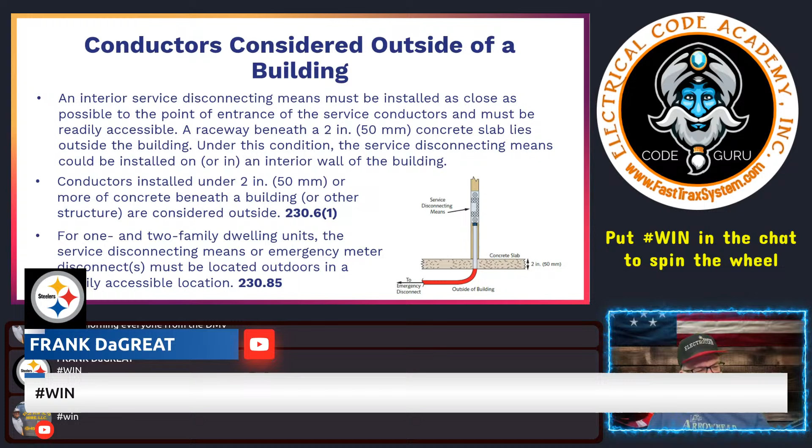Let's get back into our discussion on conductors, service conductors, and equipment. Let's talk about applications where conductors are considered outside of the building. So the National Electrical Code tells us when things are considered outside of the building. We have 230.6. Most of the time in these types of questions, when we're really concerned with something being outside of the building, it's more a service conductor driven thing, right?

Because a feeder can run through a building, and a feeder is protected by an overcurrent protective device, right? So there's protection there, but service conductors are not. The only thing those service conductors are protected from is overload, because we size the overcurrent device and we're required to provide overload, but we're not providing any short circuit or ground fault protection to those supply side conductors, right? So it's just overload protection. But if they run through a building, they really have no protection on those conductors that we can control, right? It's utility side, and I don't have control over them.

So an interior service disconnecting means must be installed as close as possible to the point of entrance of the service conductors and must be readily accessible. You're familiar with 230.70, 230.71, 230.72, the grouping requirements. But 230.70 tells us that the service conductors have to be outside or nearest point of entry, right? So in this case, what is considered outside? Well, one of the things says a raceway like this right here, installed beneath 2 inches of concrete slab, lies outside of a building.

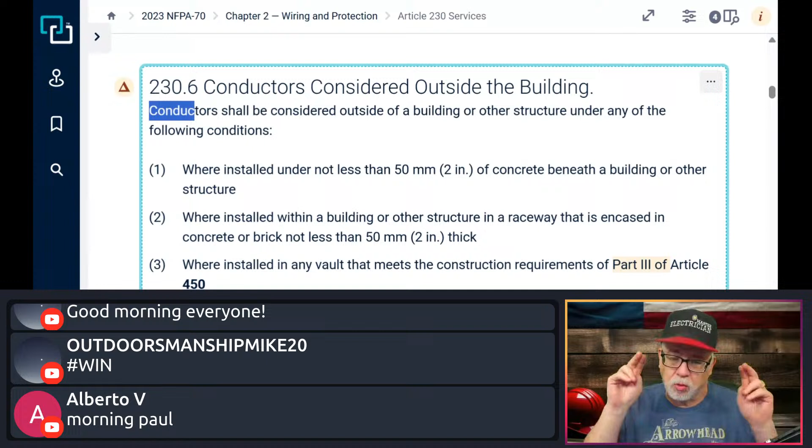So conductors, in a lot of other places in the code, when they want something to be considered outside of the building, they'll refer you here. Why reinvent the wheel, okay? They might send you to meet the rules of 230.6, even though it might be some other application. They're telling you, hey, you want to be considered outside the building? Go follow the rules here or one of the methods that are in 230.6, right?

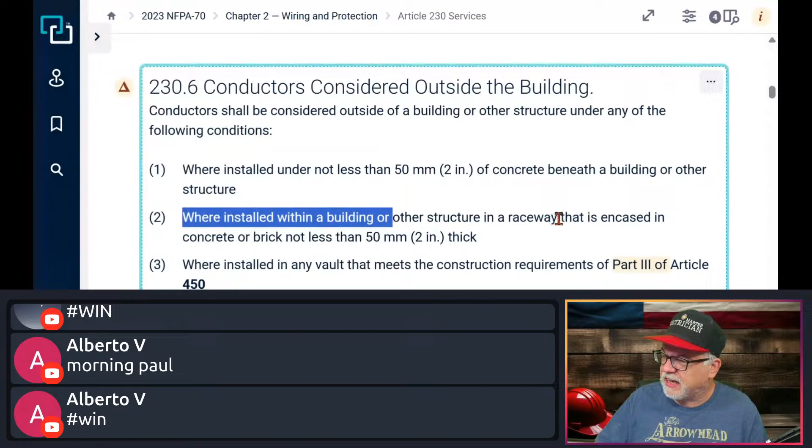Okay. Here, where installed within a building or structure in a raceway that is encased in concrete or brick, not less than 2 inches thick. So this happens all the time where maybe I want to put a service further into a commercial building, for example, and I'll run it underneath the building, and then they'll run it up into the building, but they'll encase it in 2 inches of concrete or 2 inches of brick.

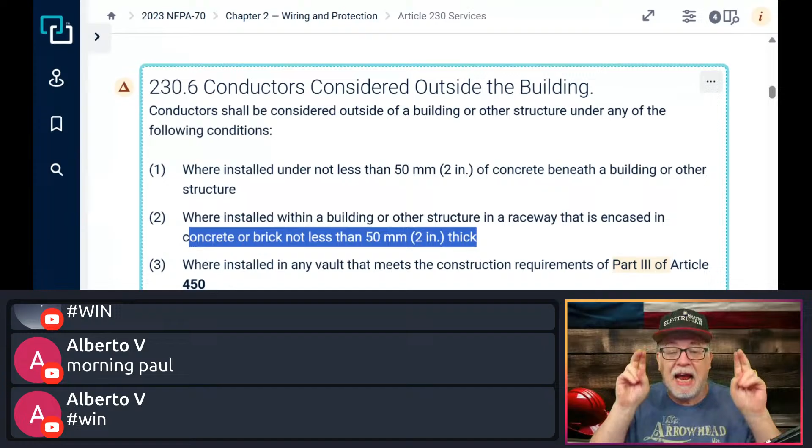Okay, and then run it up, and then they'll put their equipment. And you might go, well, it's in the building. Yeah, but it's considered outside of the building by proxy of following these rules in 230.6, right? All right, so then you got that.

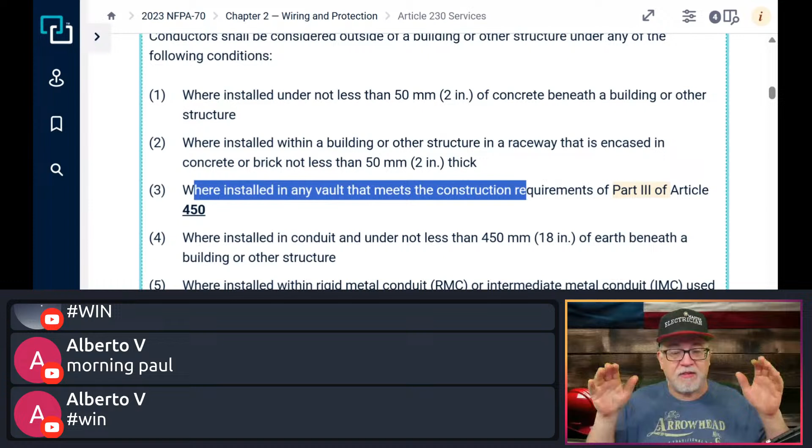And next it says where installed in any vault that meets the construction requirements of Part 3 of 450, right? So this would be like a transformer vault that has the requirements, the thicknesses, and everything like that. Well, it's a vault, and it's basically considered outside of the building if you have the vaults. So there's some advantages to that because you can come underneath the building, right? And then pop up into a vault and everything is still okay, all right?

Let's see here. Next, it says where installed in conduit and under not less than 18 inches of earth beneath a building or other structure.

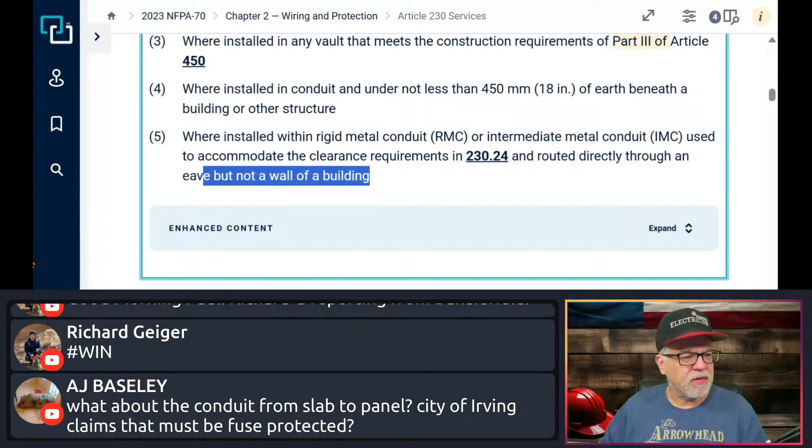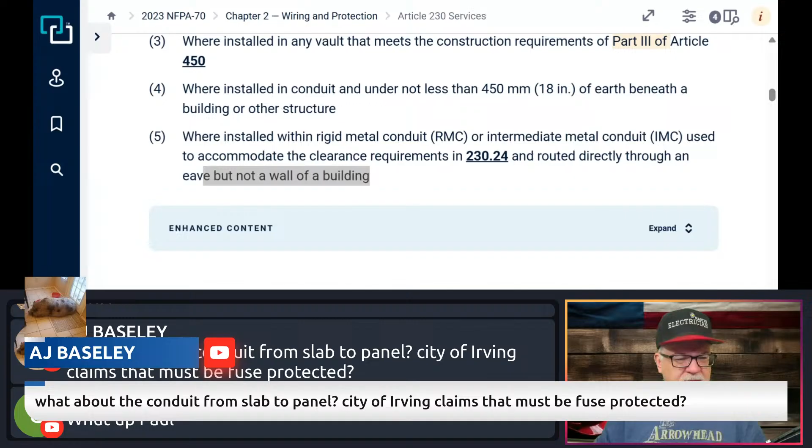AJ says, what about the conduit from slab to panel? City of Irving claims this must be fuse protected. If it is in the slab and it's a service, okay, if it is encased in 2 inches of concrete, well, the code says that either below 2 inches or it's encased in 2 inches, okay? So again, we go back to reading what it says here.

It says, where installed within a building or structure in a raceway that is encased in concrete or brick not less than 2 inches thick. Okay, so it has to be encased in it. So whatever raceway you put in it, it has to have 2 inches of thickness around it. It's not like you can put it in it and only have a ½ inch of concrete. It has to be encased in it. So a 4-inch slab, you put a 2-inch raceway in it.

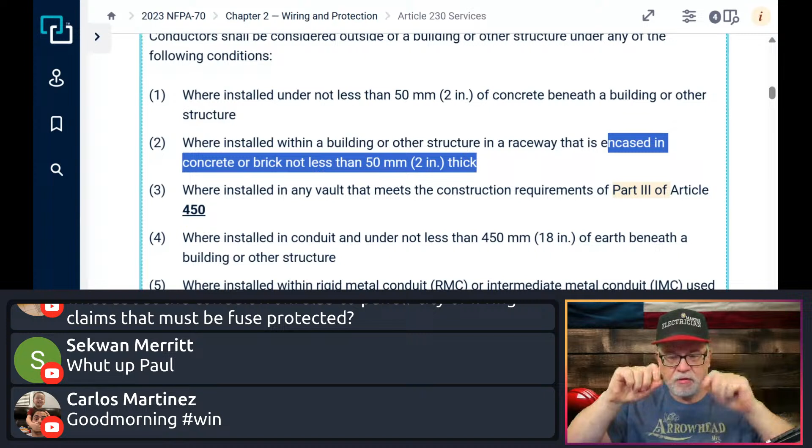Then what happens is you've got the actual diameter of the raceway, and then you have the concrete. Is it going to be 2 inches encasement around it? Right? Which means if you have a 2-inch diameter raceway, then you'd have 2 inches on the top, 2 inches at the bottom. So that slab would have to be what? 2, 3, 4, 6 inches thick. So they could be doing that where it doesn't qualify.

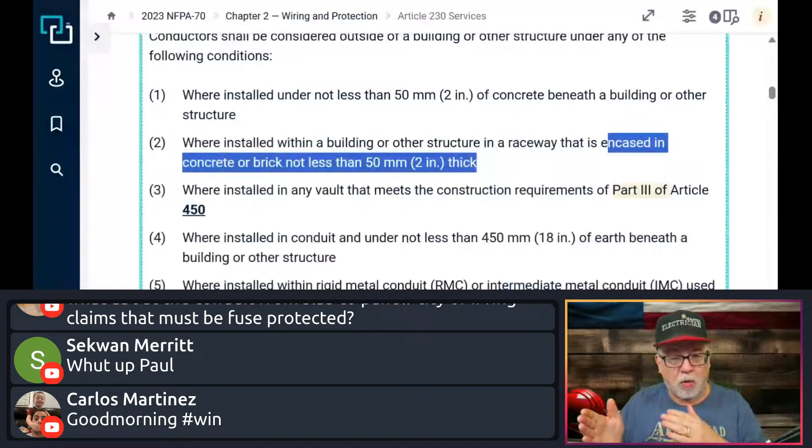Also, the big difference is whether or not we're talking feeders or service. So if we're doing this to try to keep it outside of the building, you'd have to get a little more clarity from them on why they're saying it needs to be fuse protected. Is it outside of the building? Do they have an amendment that says they're ignoring the allowances in 230.6(2)? Are they not observing this? Because here it says it's considered outside the building for any of the following conditions, okay? So you'd have to find out what their rationale is behind it.

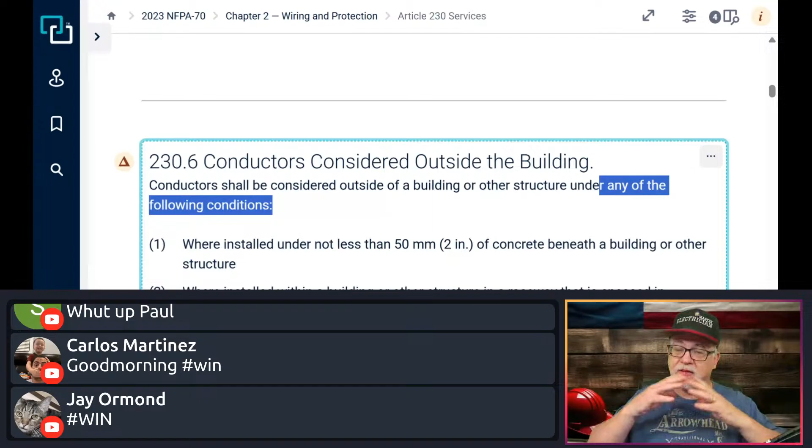Now, all feeders have to have overcurrent protection. Service conductors, again, if we're doing it to consider it outside of the building. Now, that's not going to work for 1 and 2 family dwelling applications because you're required to have an emergency disconnect outside, okay? But in other than 1 and 2 family, you can run it in the walls, that type of thing. All right, let's get back to the lesson.

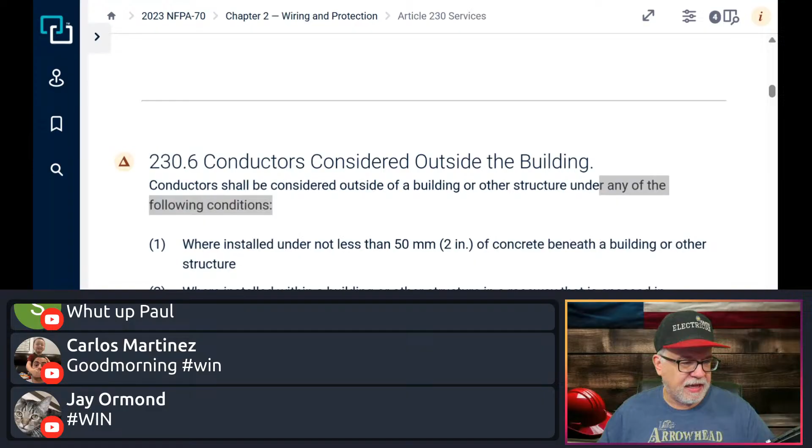All right, so that was that one. Below 2 inches of concrete: conductors installed under 2 inches or more of concrete beneath the building. Okay, there you go. All right.

All right, for 1 and 2 family dwellings, the service disconnect means or emergency meter disconnects must be located outdoors in a readily accessible location. So if you're doing 1 and 2 family applications, that right here, good.

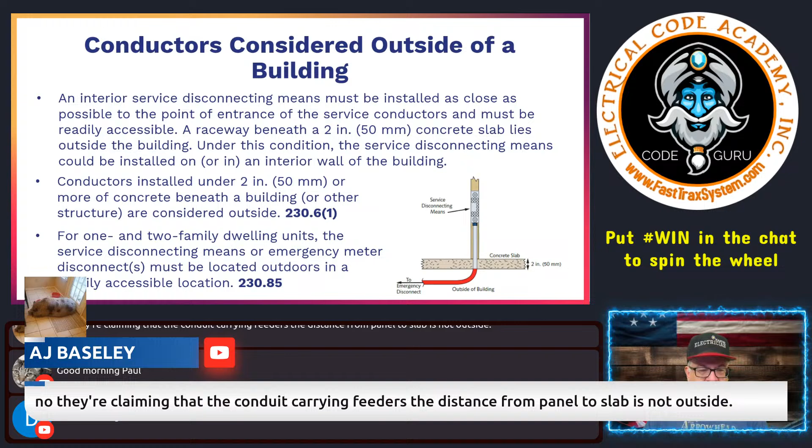What are they saying, AJ? They're claiming that the conduit carrying feeders, the distance from panel to slab, are not outside. If it's a feeder, it doesn't matter. All feeders have to have overcurrent protection. That's the only way it becomes a feeder. So I think either we're having a terminology issue here or not understanding. Are you talking about service conductors or are you talking about feeders? Because for a technical guy like me, they are different.

So yes, all feeders, whether you run it outside of a building or in the building, have to have overcurrent protection on them. Service conductors, if you follow these rules in 230.6 and you're either putting it in a conduit 18 inches below grade, or you're putting it in a conduit that's encased in concrete, 2 inches of concrete all around it, then it's outside of the building.

If you're doing it below at least a 2-inch slab, then it's considered outside of the building until the moment that it penetrates and goes into the building. Unless when you penetrate, it actually is penetrating in a brick or concrete column that is going to give you 2 full inches of concrete around it.

So again, they may not be understanding it, or maybe the situation has a few more details involved. Every installation is different, but it sounds like there's some kind of miscommunication going on with that application, or it could be just what they want.

And I will tell you, Irving, Texas tends to have a couple inspectors that can go rogue now and then. There's a great inspector in there, James Hawthorne. He's a great guy. But sometimes some of those inspectors can go a little bit too far because they're very heavily involved in the code development process and they form their own opinions. Not saying James, but in general. Sometimes they can go a little too far, but again, there's probably more details than that.

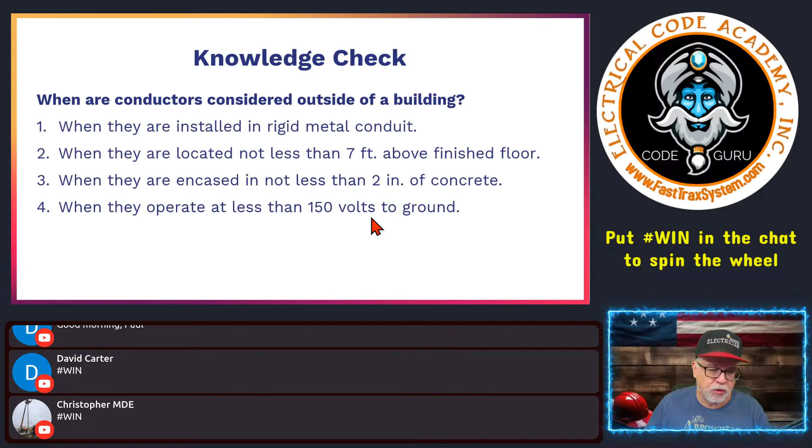All right, knowledge check. When are conductors considered outside of the building? When they are installed in rigid metal conduit? When they are located not less than 7 feet above finished floor? When they are encased in not less than 2 inches of concrete? And encased means the raceway has at least 2 inches of concrete all around it. And 4, when they operate at less than 150 volts to ground. Well, there's only one obvious answer here, and that is when they're encased in not less than 2 inches of concrete.

Let's see here. Tom says, wouldn't the closest point of entry apply once the service entrance raceway exits a slab or concrete encasement? Absolutely. So in our example, let's go back right here. This is a panel. If this is concrete encased, 2 inches of concrete around it, and this is underneath the slab, and I bring this up, this is considered outside.

If we installed it in a raceway that was encased with 2 inches of concrete all around the raceway, then guess what? It's still considered outside of the building, even though it's entering into the building. It could go to the second floor, but it's still considered per code outside of the building if you follow those rules in 230.6. And we do this for fire pump applications and other things where we want to keep those conductors outside of the building, but we may want to put it further in.

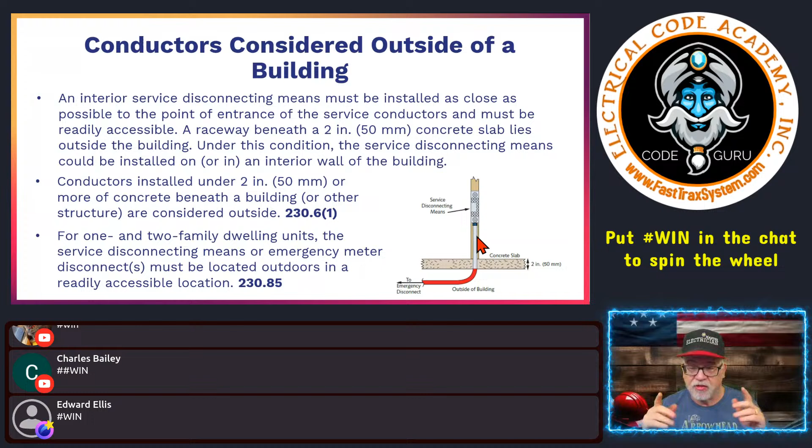The moment that it goes from outside of the building to inside of the building, then we need to have the overcurrent protection established. Now, we're not talking 1 and 2 family right now. We're talking general commercial and other than 1 and 2 family, because that still requires the emergency disconnect application under 230.85 for a 1 and 2 family.

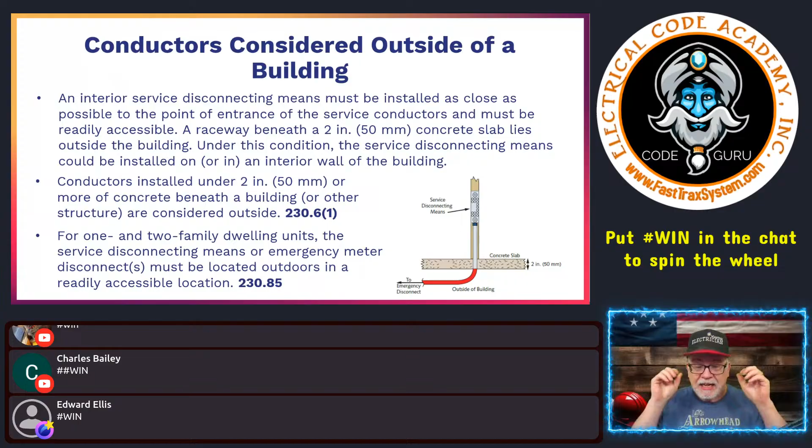Now, people say, well, wait a minute. If it comes through the slab, it's in the building. No, it's not. If it's in a raceway that's encased in 2 inches of concrete, by code it still has not entered that building yet. Basically, that concrete is separating the building from what's considered outside. The moment that condition changes, then you get the requirements for the service disconnect being outside or nearest point of entry.

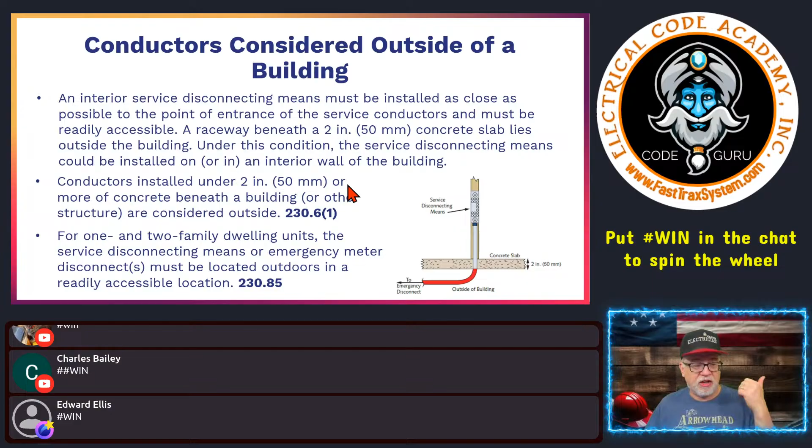Now, could you put it outside somewhere? Absolutely. Carry it in? Yeah, you could do that as well. You could even change it to a feeder. And once a feeder comes in, then you could run it through the building. Okay, not a problem.

All right, underground services. Wiring methods permitted for services of 1,000 volts nominal or less are listed in 230.43. We're going to kind of look at those. We're not going to spend a lot of time on them because that's a simple list of all the different wiring methods that are applicable for services, okay? And that is going to be in 230.43. That's like a list of all the different types of wiring methods.

Now, direct buried conduits or other raceways must be installed in adherence with Table 300.5(A) minimum cover requirements, okay? 300.5, just so we can look at it. This is a depth of cover table, and people ask me quite a few questions about this. So this is for underground applications. This is minimum cover. This is for direct burial cable. This is for conduit or other raceways, which shall be installed to meet the minimum cover requirements. So this is your minimum cover requirements table right here.

Right, 0 to 1,000 volts. Here's your depth of cover. And over on the left, you have the location of the wiring method or the circuit itself. So it's the general catch-all, all locations that are not specified. People ask me all the time, what do I do if it's not specified down here? Well, then you go right here. There's your default. Pretty simple. If you have an application where you're going to use these down here on the left side, then you have varying depth depending on the wiring method or type of exposure, right?

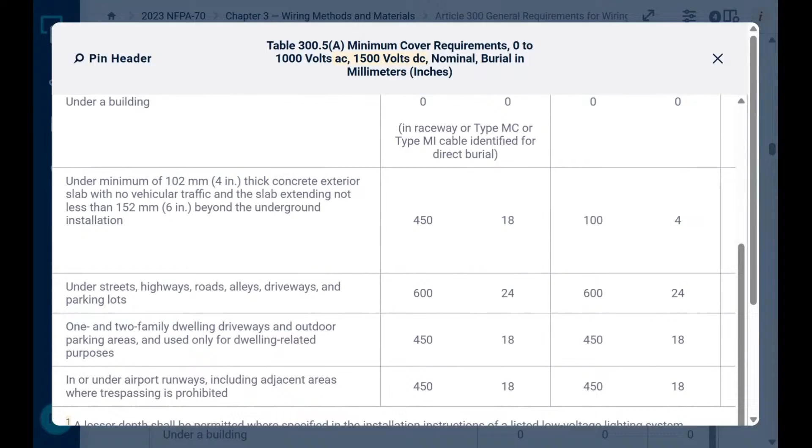So an example, direct burial cables, USE-2, just a cable assembly rated for direct burial, or the individual insulated conductors like a USE-2 that are either plexed together or dropped in a trench. Their cover is going to be 24 inches. The utility may be deeper. Theirs might be 30 inches, might be 36 inches. But we're not talking about the National Electrical Safety Code. We're talking about the National Electrical Code. So this is your catch-all for all of the locations, just for direct burial cables.

But what if I have all those other locations and I'm using rigid metal conduit or intermediate metal conduit? Then I can reduce the depth of cover to 6 inches because of the strength of the rigid metal conduit or intermediate metal conduit. So what does that mean? One of the most important things I talk about is that it's about the cover. It's from the top of the wiring method to the final grade. Whether you have asphalt, dirt or gravel, it's the final grade down to the top of the wiring method, not to the bottom of the trench.

So a lot of people may make a mistake and dig an 18-inch trench when the cover requirement may be 18 inches, but they forget that the raceway they're putting in there may be 2 inches in diameter. So if they have to have 18 inches of cover, right?

So at the end of the day, you get to have a reduced clearance, but you have to make sure you're accounting for the top of the wiring method all the way up, not just the trench itself. So an 18-inch cover might need to actually be a 20-inch deep trench in order to accommodate the wiring method. You get what I'm saying? So here you see the columns. This is for direct burial, and this is just the catch-all locations right here, the very top one.

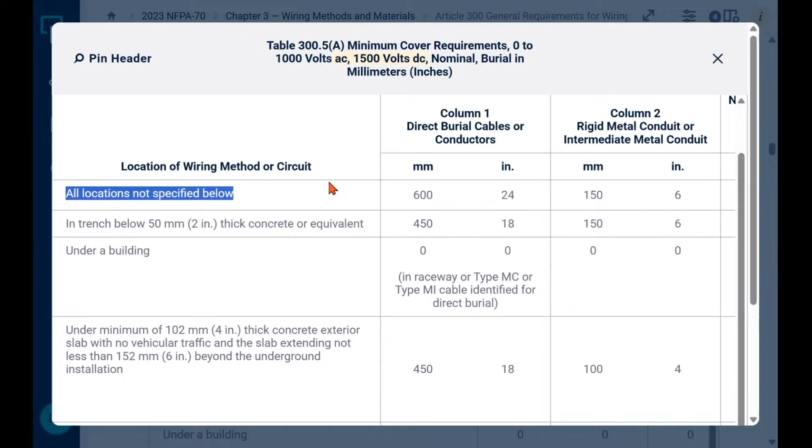And I usually tell students a lot of times to highlight this with a different color just to make sure that it stands out, because you get some reductions down here based on these actual locations of where the wiring method or the circuit is. But this is your catch-all right here, all right? And you go over here to the right, you'll see here, this is your column 3.

This is for EMT. Again, I have so many people that say, oh, you can't throw EMT in the ground. You most certainly can. In fact, it's listed right here in the table. Well, I wouldn't do that. It would rust out. Then you've got some shitty EMT, because the manufacturers of it do put a corrosion-resistive coating on it. So, but anyway, here's EMT.

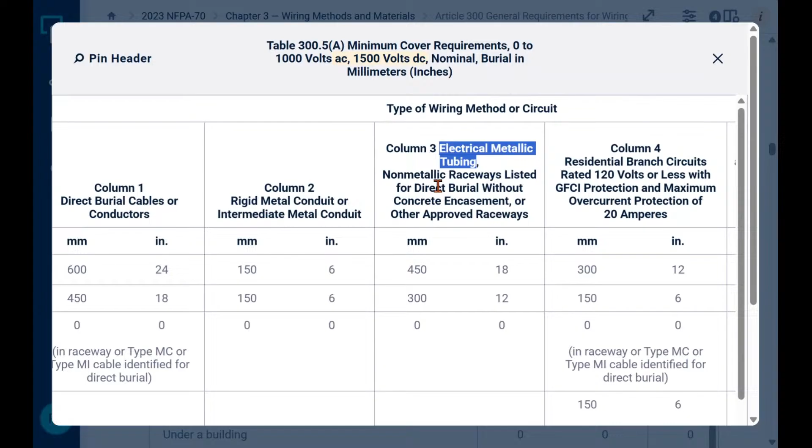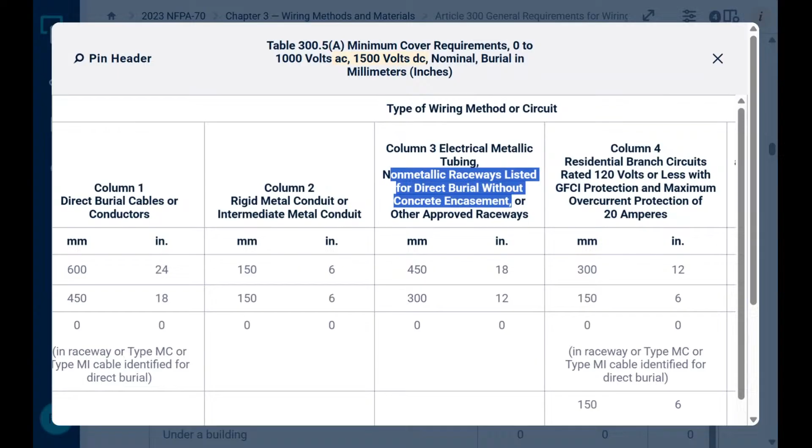Here's the non-metallic raceways used for direct burial without concrete encasement. That means that it's PVC, Schedule 80, Schedule 40, just thrown in a trench, right? There you go. Or other approved raceways from the manufacturer. This may be also like a reinforced resin type of raceway that the AHJ is okay with, that's marked for direct burial, that you could throw in there.

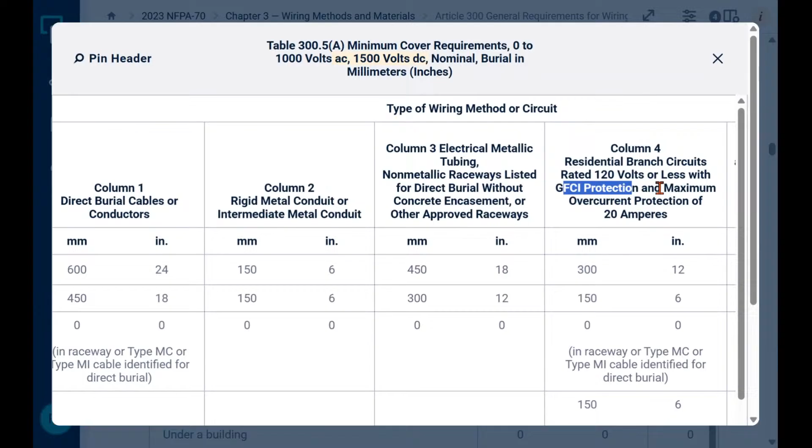There you go. And of course, you have column 4, which is residential branch circuits. An interesting one about this one is you have to meet all these caveats to even get any of these reductions, okay? So for residential, it has to be a residential branch circuit. It has to be rated 120 or less. It has to be GFCI protection on it, and the overcurrent protection cannot exceed 20 amps. If you meet all those conditions, let's say it's going out to a post light or something like that, then you can have a reduced cover.

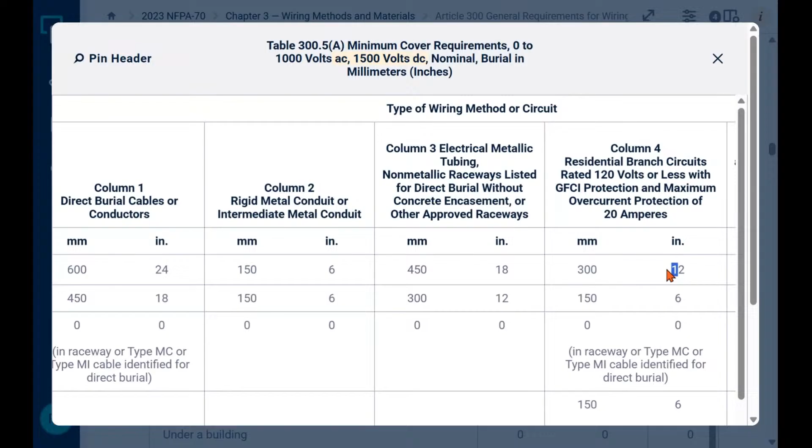So the general would be 24 inches, right? For a general application, for, let's see here, for a UF cable, right? But over here, if that UF cable is being used and it meets all this criteria, then they have a reduction to 12 inches of cover, okay? Makes sense? All right, so then you got that.

And then, of course, you got column 5, which is dealing with things like irrigation and landscape lighting and that type of thing. Not more than 30 volts, okay? Not more than 30 volts, and installed with type UF or in other identified cable assemblies. So you got to meet all of these caveats in order to get these reductions.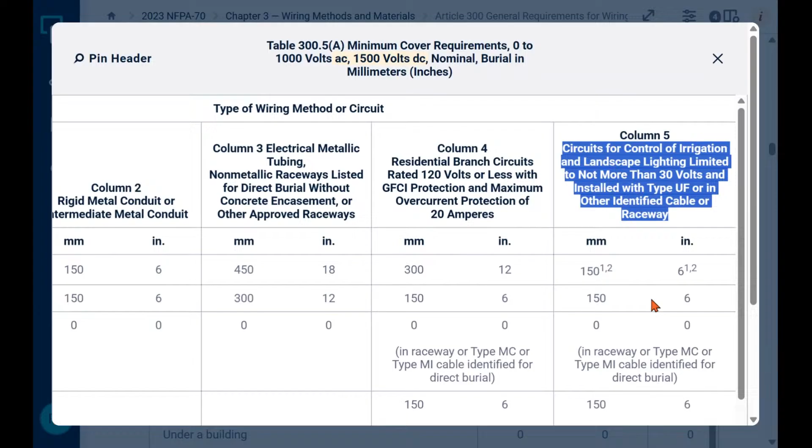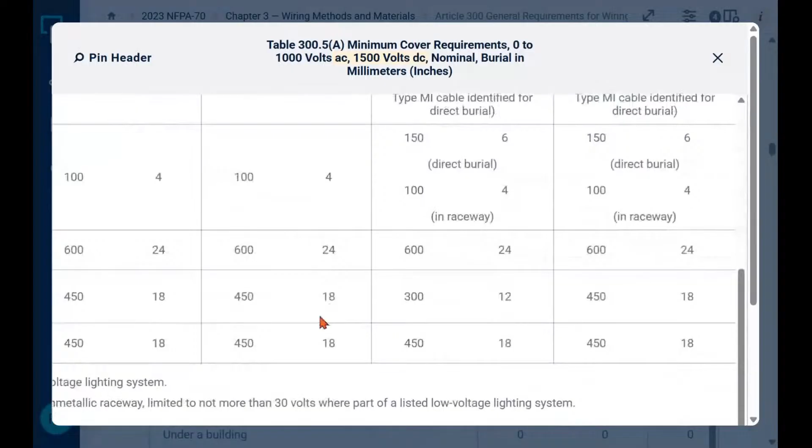Now, you do have some notes here. This is a good time for me to point out about notes again. All these notes that you may see in anything like this, these things like this, that's going to be talking about these different notes down here. And these different notes down here are going to talk about all kinds of things, whether or not you can reduce your depth of cover, what happens if you hit rock bottom when you're doing your trench.

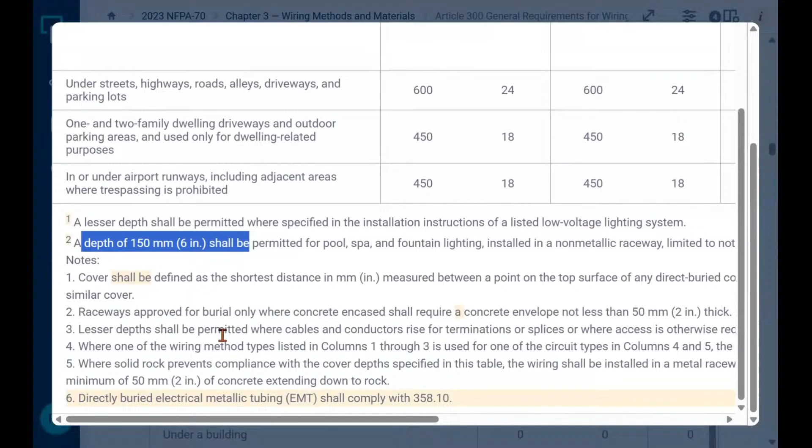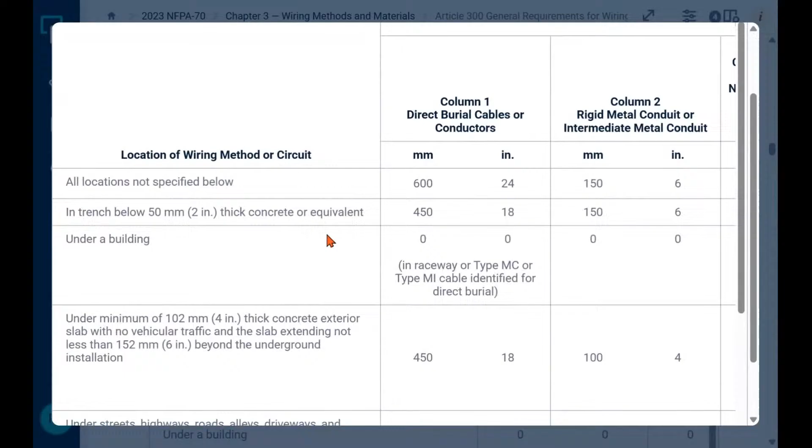These notes are very much applicable, guys. These are not like informational notes where you don't follow these. These are very much germane to this table when they're referenced, okay? So keep them in mind. These notes can be important, okay? So you always want to glance down at your notes because these may have some application.

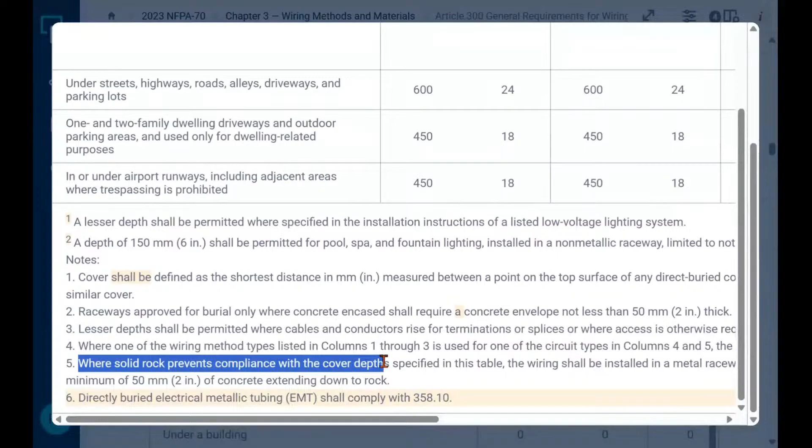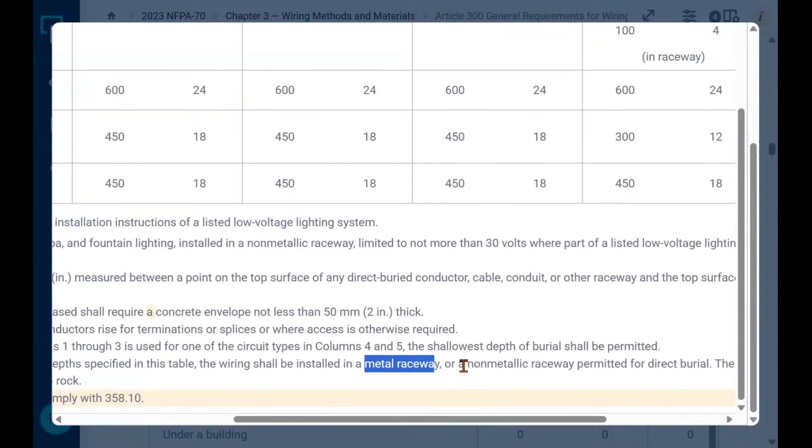For example, biggest one that we run into right here. So you're doing your depth of cover, right? You're digging your trench. And it says where solid rock prevents compliance with the cover depth specified in this table. It means you hit rock when you're trying to get down 24 inches, let's say. It says the wiring shall be installed in a metal raceway or a non-metallic raceway permitted for direct burial. It means it's marked for direct burial.

It says the raceway shall be covered by a minimum of 2 inches of concrete extending down to the rock. Okay, so minimum of 2 inches of concrete over top of it, above the wiring method, right? And if that's the case, then you can have your reduced clearance down to as deep as you can get because of the rock.

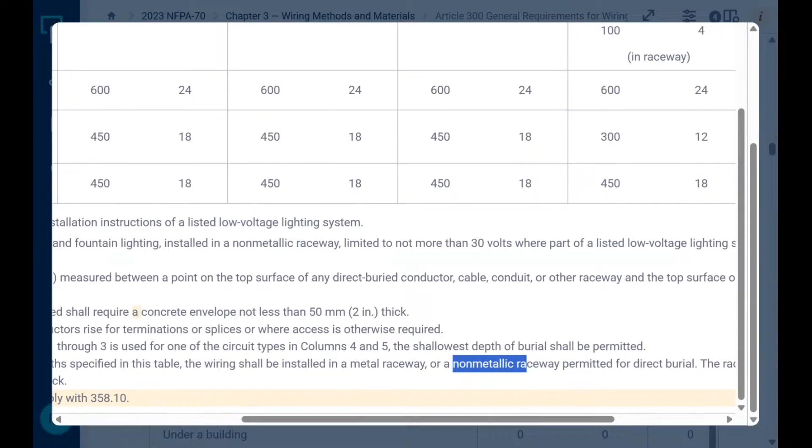But as long as you put this 2 inches of concrete over it, and you're putting it in a metal raceway or a PVC, for example, and it says non-metallic because it could be something like a fiberglass reinforced type of raceway, that type of thing. As long as you do that, and you're putting that 2 inches of concrete extending down to the rock, then, dude, you're okay. You're going to be fine. You're not going to have anybody damage it or whatnot like that.

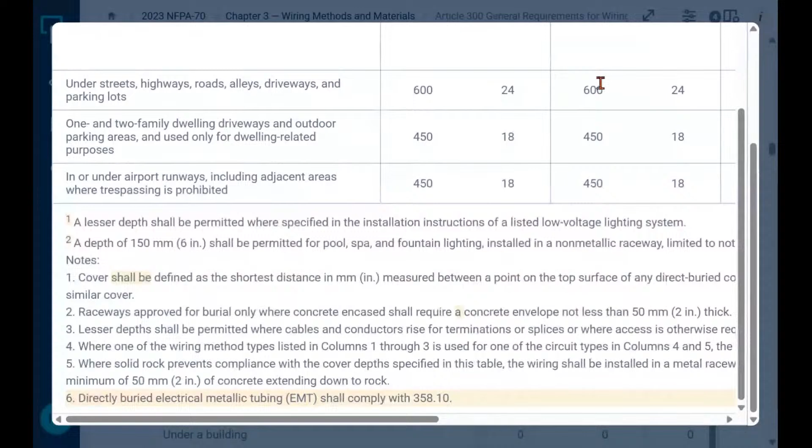So anyway, that's just kind of looking at the table. Let me get rid of that real quick. Let's get back to the lesson. All right, so there you go.

So it says where the conductors or cables emerge. Okay, so once you are under grade, and by the way, here's a good example of this. So this is your cover. Right? You got to account for the wiring method, okay? Got to account for the wiring method, okay?

Now, Peter says the compression, well, it's not so much about the compression as the fact that you couldn't use something like a standard EMT fitting because it's not going to seal. It's going to allow moisture to get into it. So you're not sealing it, and they're not listed and evaluated for direct burial, that type of thing, okay?

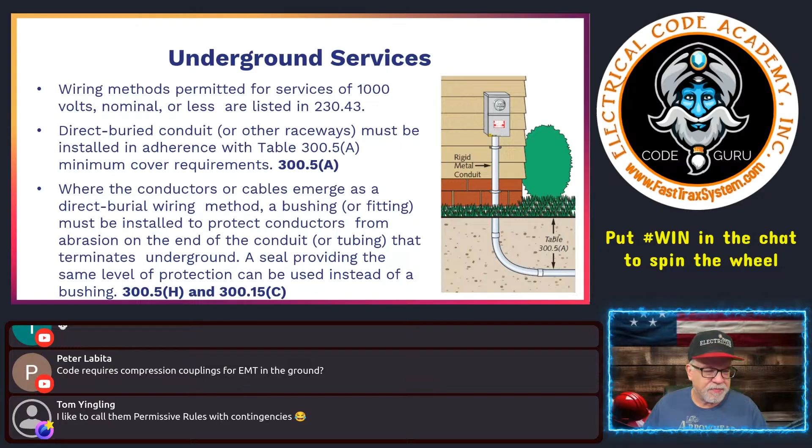So, all right, where are we at here? Where these conductors or cables emerge as a direct buried wiring method, a bushing or fitting must be installed to protect conductors from abrasion on the end of the conduit or tubing that terminates underground, okay? So a lot of times, and I don't know if we have a picture, we don't, this raceway may come down if you're going to bring like USE-2 conductors in, and it gets to the end right here. So this end has to have a bushing on it so that these conductors can go in and come up, okay?

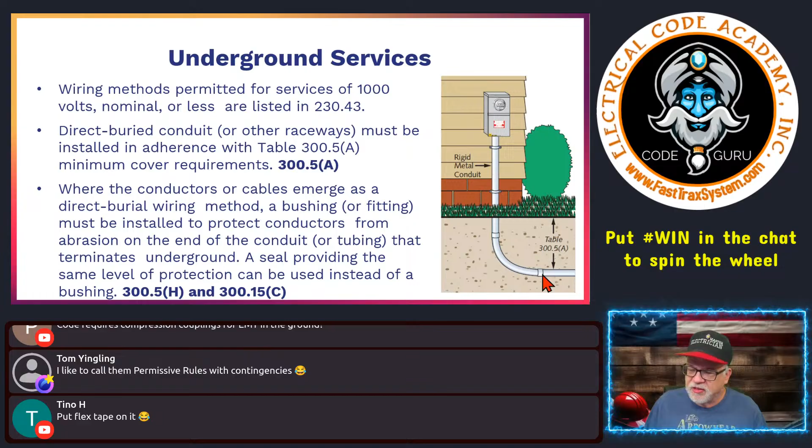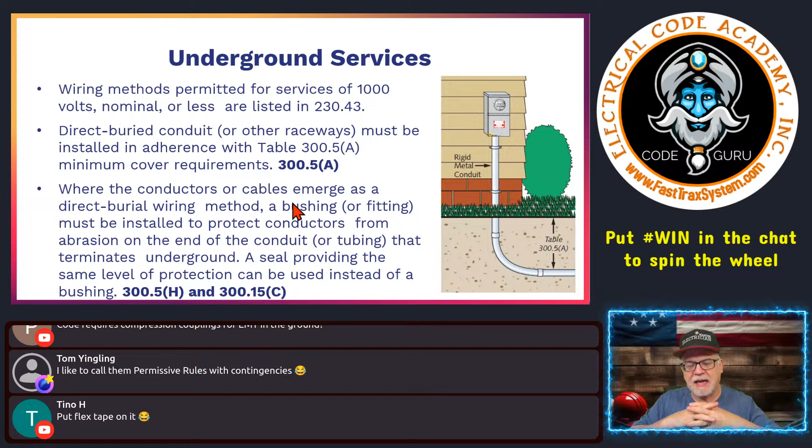Or you could have some other type of fitting that makes the bushing irrelevant, so it's not going to damage the conductors, or you could seal it with a sealing material. One of the companies makes a sealing material that will go actually in it. You would pump it in there, and it would seal around all these individual conductors, and then you don't have to worry about moisture coming in and getting up into your equipment. So again, you could do it that way.

So this is kind of a long sentence, but if you were to go to 230.43, you'll see a list of different types of wiring methods that you can use, okay? So, for example, this is your open wiring on insulators. This is your IGS. This is your rigid metal conduit right here. There's your intermediate. There's your EMT, all right? There's your electrical non-metallic tubing, ENT. Yes, that can be used for service as well. Service entrance cables, wireways, busways, auxiliary gutters, rigid polyvinyl chloride conduit, that's your PVC.

Cable bus, MC cables, believe it or not. Yep, MC cables used for service conductors. Mineral insulated metal sheath cable, MI cable. I don't see anybody doing that, but you could. Flexible metal conduit, FMC, or liquidtight flexible metal conduit, as long as it's not longer than 6 feet, between raceways or between raceway and service equipment. Okay, so you do have a little bit of length that you're able to use an FMC or LFMC.

With a supply side bonding jumper routed with the FMC or LFMC according to 250.102(A), (B), (C) and (E) provisions. Liquidtight flexible non-metallic conduit, high density polyethylene conduit, that's HDPE.

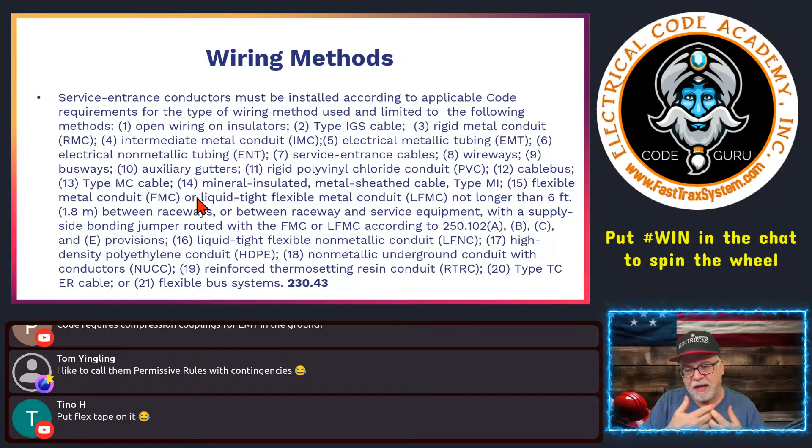Clearances. Now, this is going to get interesting for people because I have a lot of people that say, hey, from that utility pole, that service drop that comes over to the side of my house, I got an inspector telling me I got to have certain clearances on that. All right. So this is important stuff that we're going to learn about clearances. So the point of attachment, that is right here. This is where this drop would attach to the side of the structure.

It says the point of attachment of the overhead service conductors to a building or other structure must meet 230.9 and 230.24 minimum clearances. In all cases, this point of attachment, right here, must be at least 10 feet above finished grade. So that point of attachment may be the reason why some people have to go through an overhang or put a mast or do something to get it up high enough, because that point of attachment must be at least 10 feet above the finished grade.

Okay, that's a given, right? And as always in our FastTrax programs, you'll see the code references. Always go check out the code. Go in and out of your course, okay? Don't just read it here and say, I'm done. Go in and out of it. That's the whole process, right?

Also, overhead service conductors accessible only to pedestrian traffic must have a minimum 10 feet vertical clearance above finished grade, sidewalks, platforms, or projections that will permit personal contact. People will be able to walk under it, get to it. All those types of things are going to have a minimum of 10 foot of clearance, okay?

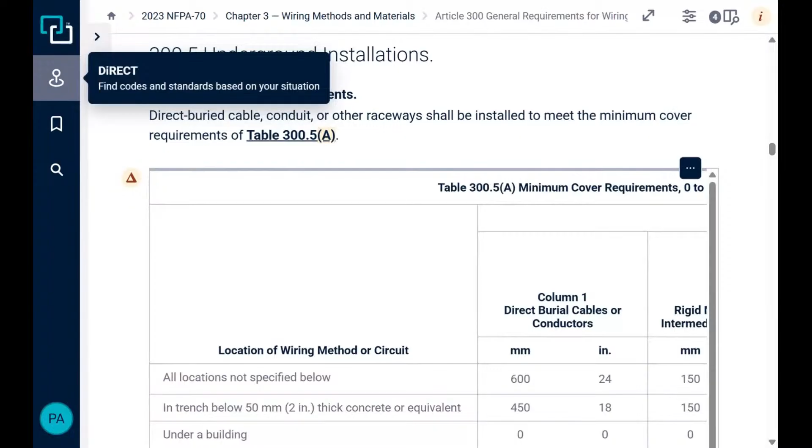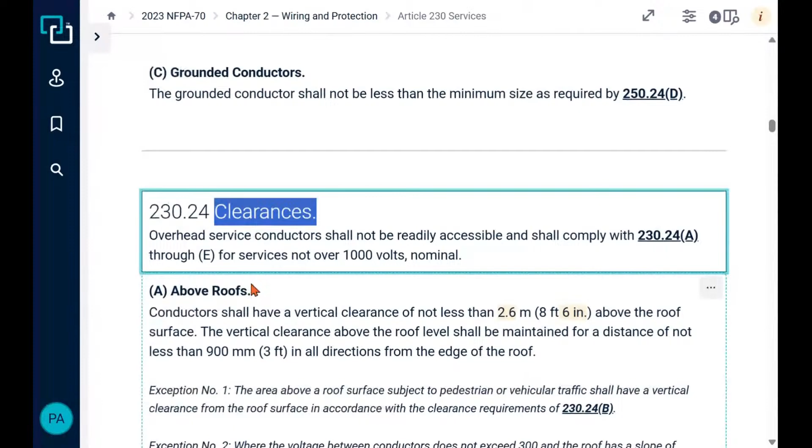Now, one of the important things that I like to point out here, I'll go to the code because this is important stuff for me to point out, is when we go look at the code, and we'll go back and look at this real quick for clearances, okay? So here we're in clearances. And this is the one that people all kind of point to when it comes to clearances. And the other one that I'll show you real quick is this one, point of attachment. So this is where we got in no case shall it be less than 10 feet. So the point of attachment, okay?

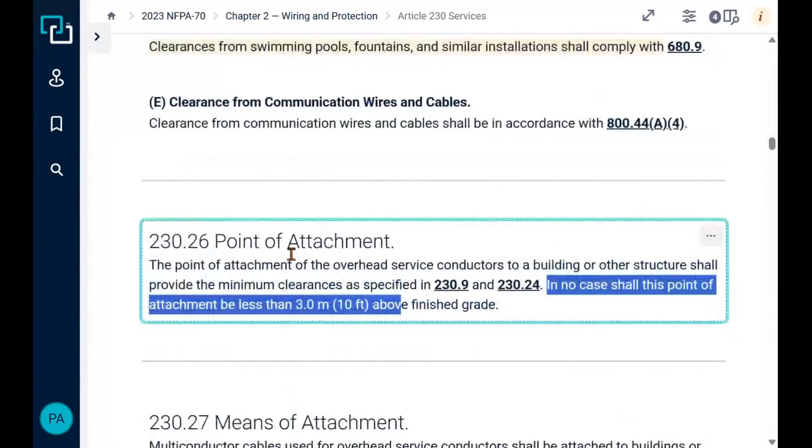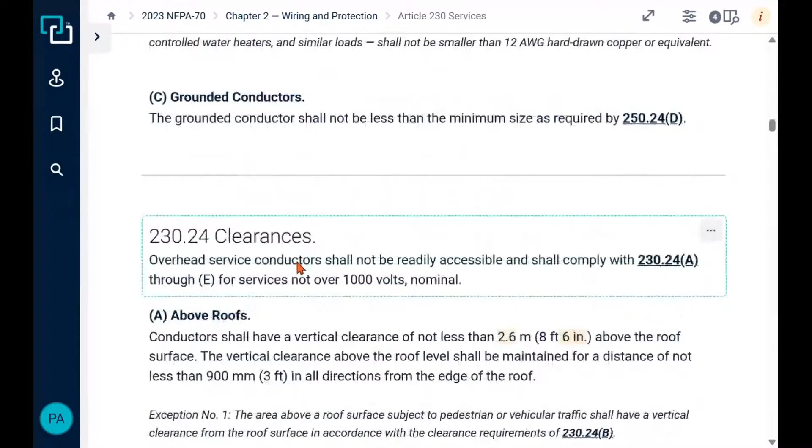But the other thing that people tend to lose sight of is all these vertical clearances, the 10 foot, 12 foot, this span. I'm going to show you something. And we want to start that journey right here in clearances. Notice what it says, overhead service conductors. It does not say, folks, service drops, okay? Massive, huge misconception. Now, the utility may use the NEC, and it may follow the same guidelines. The inspector may enforce it the same way, but it's talking about overhead service conductors. That's implying not from the transformer to the point of attachment. That's a drop from the transformer. That is service drop conductors. It's a defined term in the NEC, okay?

Usually outside of the scope of the NEC, but we have other things that talk about it because they do come to the building. So we have to talk about point of attachments. We have to define it. But as I said yesterday, if you joined us yesterday, if the utility stops, let's say your property is 100 feet in, and the utility is on a pole, and they say, look, we'll go 50 feet onto your property. That's as far as we're going to run it overhead. Okay, so they go over and they put a transformer at the property, and then they bring it over to a pole that's 50 feet in, right?

And then at that point, they go, we're done. From there to the dwelling, that becomes the point of attachment still at the building, but there, that is the line of demarcation where the utility leaves off, okay, in the National Electrical Safety Code. And then the NEC will pick up, because from that pole, that final span that's going to go over to the dwelling, let's say, or the building, becomes something the electrician has to be aware of.

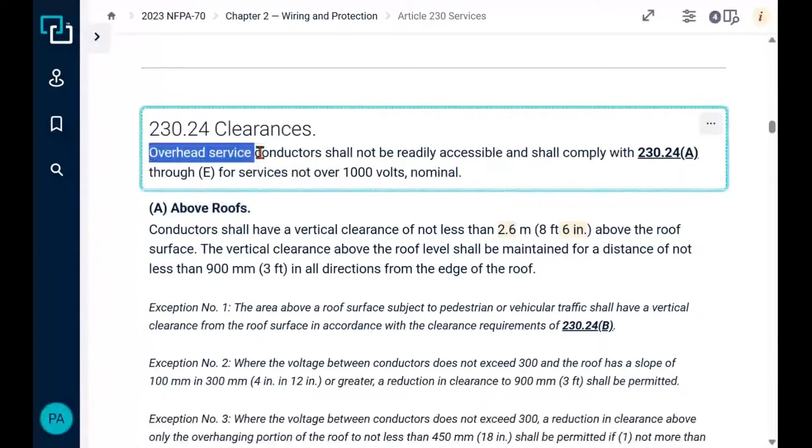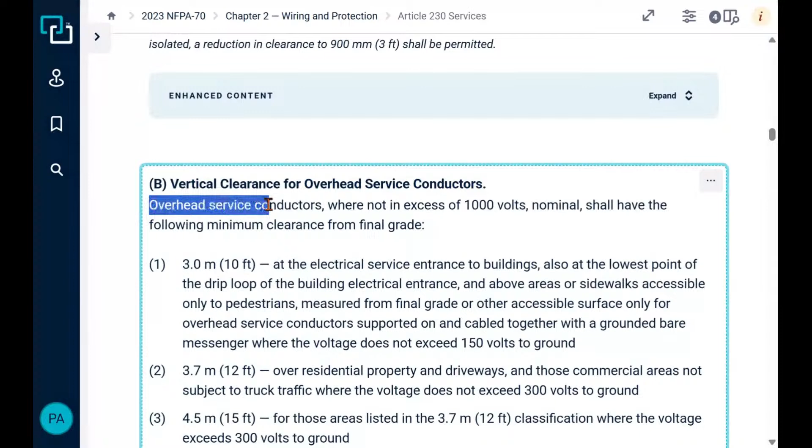And a lot of times people enforce stuff because they really just don't know, right? They just enforce it blindly. But here you can see that these clearances above roofs and things like that are talking about overhead service conductors, right? And just wanted to throw that out. And then you go down here, vertical clearances, okay? 10-foot rule. You notice it says vertical clearances for overhead service conductors. All those type of things, right? So important. These are sometimes things that people overlook, right?

And I'm sure there's an illustration here. So you notice something right here? No transformer on this pole, okay? But if this right here was under the purview of the electrician, and maybe the utility left off right here, or they've gone all the way back somewhere on the property, well, all of these clearances now are under the purview of the NEC, okay? But these are overhead service conductors. They are not service drops at this point.

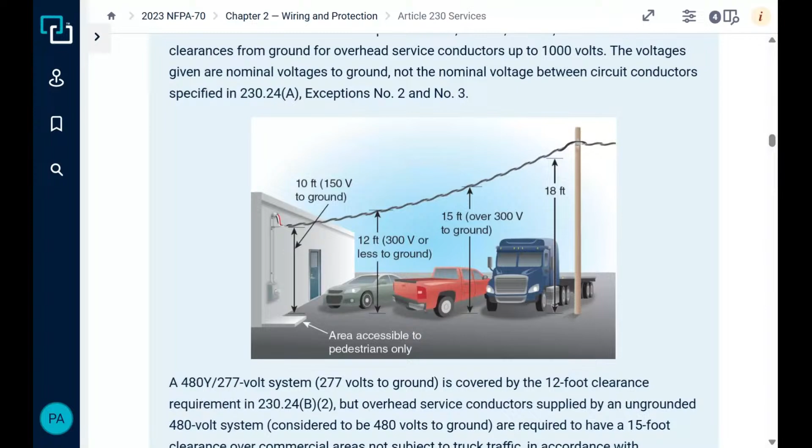Now, if this had a transformer right here, and the utility ran this down to the point of attachment, then these would be service drop conductors. And they would technically not be covered by the NEC, although they're going to pretty much work hand in hand with the NEC. And most of the National Electrical Safety Code draws a lot of their information from the NEC, or they have their own blue books, their own rules, their own regulations, but you may get an inspector who calls it out. The one thing that I cringe at sometimes is home inspectors call that out, like the electrician can do anything about it.

They can't on a service drop. They really can't. They're not going to go out there and move that. They need to contact the utility. So again, if the utility was okay with it, all a home inspector can do is write it up and make the homeowner aware of it, but that's not something an electrician can fix.

Now, it might be that the only way to fix it is for the electrician to move the masthead higher so that that drop comes down, because we don't want the utility to come and put it tight to try to keep it up. We want to make sure it's able to get up high enough so that they get their clearance and that type of thing. Okay. And what I see is a lot of older properties where nobody paid attention to that minimum of 10 foot to the point of attachment. They didn't care.

And unfortunately, that's where a lot of the old home inspections happen, whereas they go to older homes and the utilities didn't care, the inspections didn't care, maybe they didn't have the right good rules at the time, and so things are what they are. Now you got a home inspector coming in there and saying, well, you got to meet code. I'm like, dude, they didn't have a problem with it when it was originally installed, so you can note it for your liability, but you ain't going to be able to change it. It is what it is, okay?

And we all know a home inspection is nothing more than a negotiation anyway. They hold zero authority in the sales process. Hopefully people know that. Good information. Love my home inspectors. I teach a lot of them, but they have to remember their role in the process. They basically are facilitating a negotiation between the seller and the buyer. That's it. They have no code authority on anything. They may think they do, but they do not.

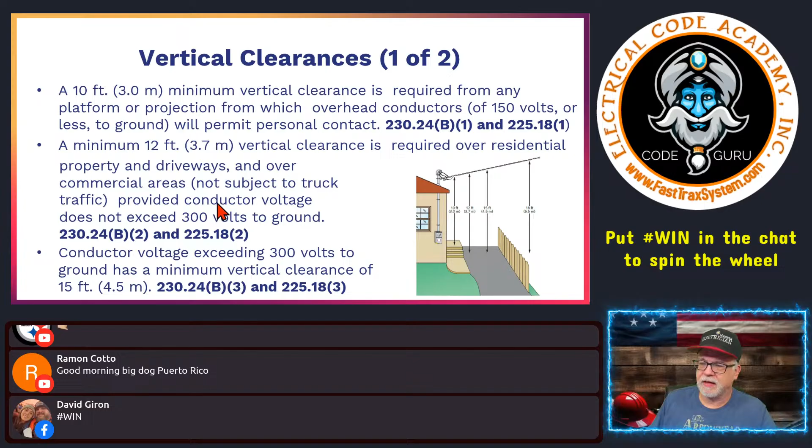Okay. Public streets, alleys, roadways, parking lots subject to truck traffic, yada, yada, yada, then they're going to have an increase to 18 feet of clearance. Also seen this on exams when it talks about areas where you're going to have the overhead service conductors going over areas with cultivation, grazing, orchard. Then that's going to be a minimum of 18 feet because of the pickers and all those other types of equipment that have buckets and lifts and things that could go higher. So again, it's all relevant to where that traffic is going to be.

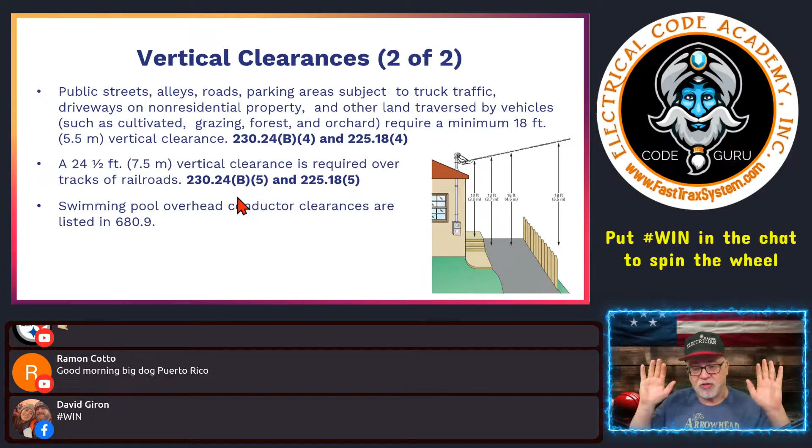And ultimately culminates into something like if you happen to be going over railroad tracks, then we need 24.5 foot clearance vertically over railroad tracks. People say, when would that ever happen? Well, it happens a lot in the rail yards, right? Where you'll have these overhead service conductors coming over, feeding different areas, and it may not be service drops. At this point, utilities said, dude, I'm stopping. Now this is a rail yard. Y'all run y'all's stuff. Then they have various clearances they have to meet, okay?

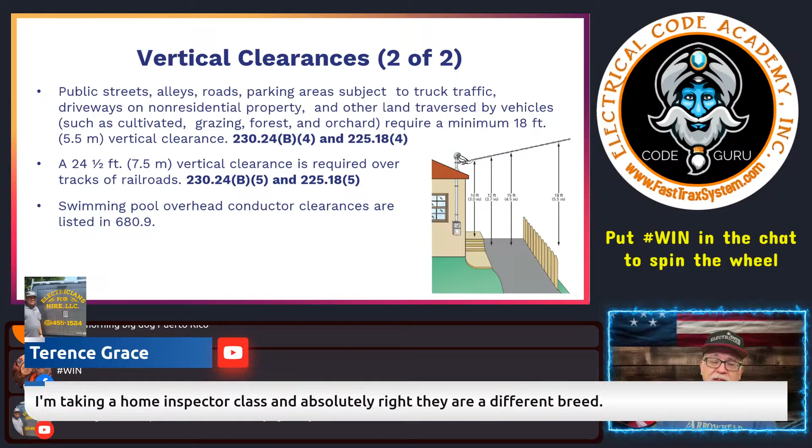They are different, Terence. Absolutely. I have written books for home inspectors. I teach home inspectors. If you're a member of NACHI, I originally wrote or co-authored their original electrical course, and they still use it today. I just don't edit it anymore. And I did a lot of their videos. So if you're in NACHI and you go through their electrical videos, you'll probably see a video with me in it.

The original video I did, dude, I think I must have weighed 270 pounds. I look like a damn beached whale in that video. I'm bulging out of my shirt, and it ain't because of the guns, all right? It's because of the pudding.

But at the end of the day, I taught a lot of HIs, and a lot of them are great, but a lot of them think that they're a municipal inspector, and they're not. And so we have to kind of gauge that.

Let's say swimming pools, overhead conductor clearances are listed in 680.9. So while these are general clearances in 230, this is another great example where the code can supplement or modify, right? You've heard me talk about that in the code. We talked about that at the beginning of the week when I did some NEC layout.

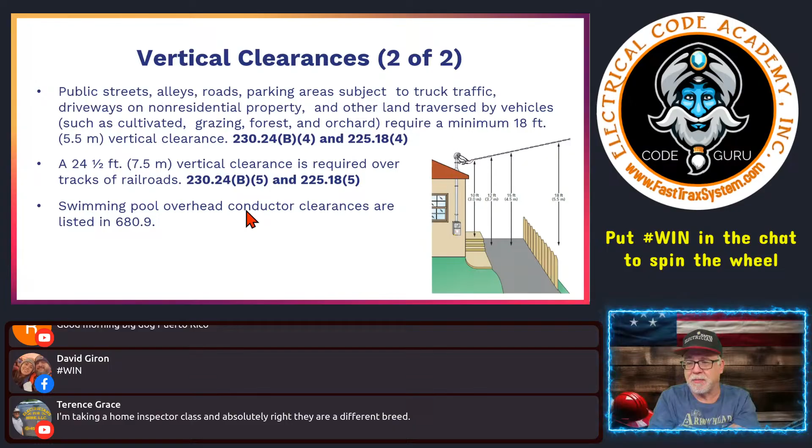The code can modify or supplement, and this is a case where 680.9 is going to add some additional clearance requirements when you're working around swimming pools and things like that. Okay. Now, what about above flat roofs? Conductor clearances above flat roofs. So conductors must have a vertical clearance of at least 8.5 feet.

So if you look right here, this is a flat roof. This roof can obviously be walked on, so we have to have this clearance. So here is the minimum clearance above the roof surface. These are your code references, by the way. Jot them down, it's your homework. You'll notice this is for services, but this is also a 225 clearance. This is also a feeder clearance. 225 is outside feeders and branch circuits.

So conductors must have a vertical clearance of at least 8.5 feet. So this is what this picture illustrates. This red area is showing you this no-go zone above this flat roof. Now that is your vertical clearance. Now the vertical clearance above the roof must be maintained. Conductors that pass over a rooftop must maintain this vertical clearance for a distance of at least 3 feet from all edges of the roof.

So think of this as an umbrella. Here's your rooftop, 8.5 feet up, and basically this goes out 3 feet all around the perimeter. And I always like this image, because this raceway is going up in order to get the height that's necessary. People say, well, does that mast have adequate strength if it's rigid or intermediate metal conduit or whatnot? Remember my golden rule?

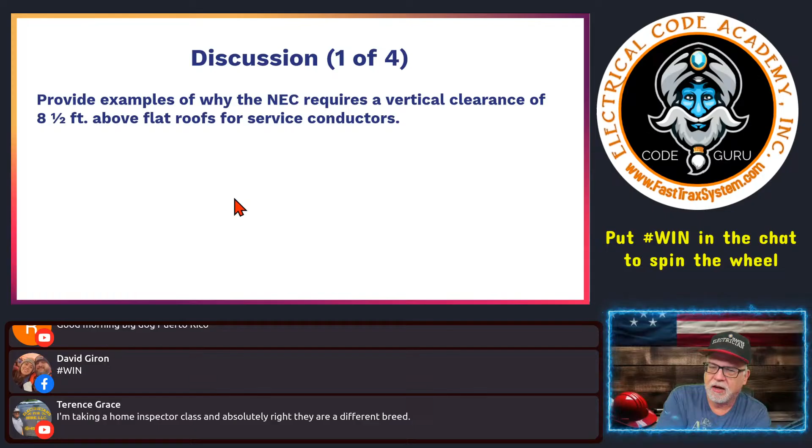So let's check your knowledge today. It says, provide examples of why the NEC requires a vertical clearance of 8.5 feet above flat roofs for service conductors. Well, the real reason is flat roofs are commonly used for outdoor seating at restaurants, dwelling unit applications, and so on. You have seating, kind of like balcony areas over a room, but it's a rooftop. People sit out there and enjoy it. They're designed that way.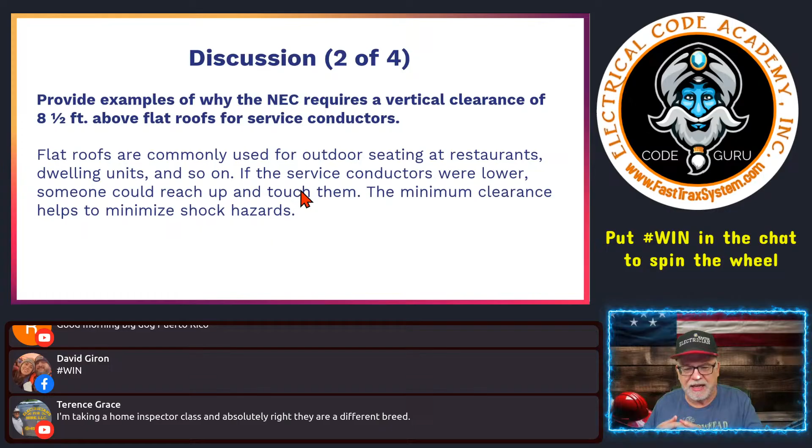So if the service conductors were lower, someone could reach up and touch them. The minimum clearances help to minimize the shock hazard. That's one of the premises of the code, to protect individuals that would come in contact or work with electricity. So that's what we're doing.

Now, conductors above a sloped roof. So we talked flat, 8.5 feet. What about if you've got a slope on it? Well, if the voltage between conductors does not exceed 300 volts, very typical in a dwelling, we have an allowance for a reduced clearance. Phase to phase on a 120/240 for a typical dwelling, it's not going to exceed 300.

So if we have a slope on that roof that is not less than a 4/12 pitch, then a 3-foot clearance is permitted. So if we have a slope that is not less than a 4/12, then I can have a reduced clearance above the rooftop, and I can drop it down to 3 feet.

And then the whole concept of this is that if you have a 4/12, not less than 4/12, then it's steep enough that there's a chance that people aren't going to be up there unless they're trained professionals up there to do a task or a job, and then they have to be very prepared for what they're going to encounter. I mean, they're trained professionals, right?

So again, you have the allowance to reduce the height, 8.5 feet above a roof, if you have the sloping that is not less than 4/12 pitch, okay? And if you have that, then you can reduce that clearance down, okay? I'm gonna be honest with you.

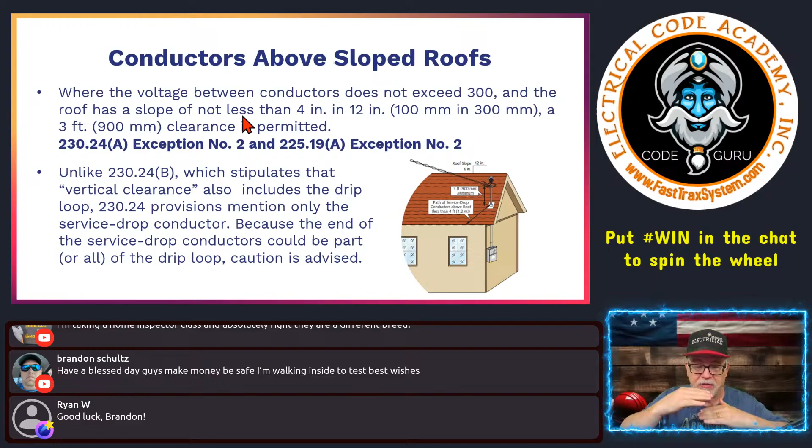If you do answer it on the third wave, uncheck it and go to the next one. And then the time that you have left, focus on the things that still are marked, okay? Relax, breathe deep. You got plenty of time. Take your time. You got it, all right? Okay. All right, where are we at here?

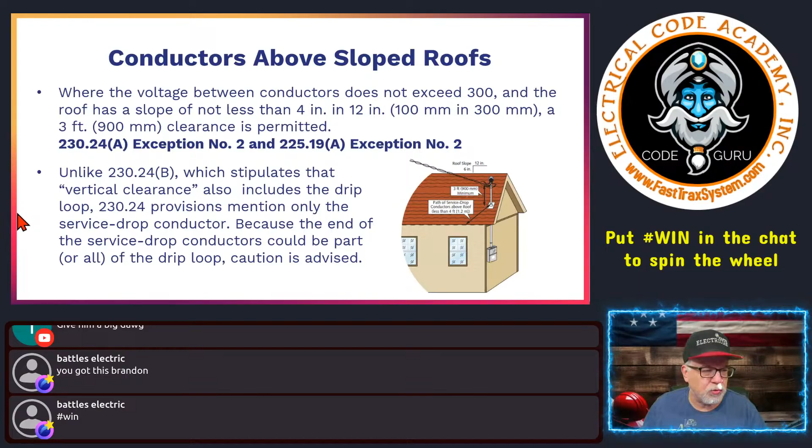So unlike 230.24(B), which stipulates that the vertical clearance also includes the drip loop, 230.24 provisions mention only the service drop conductors, because the end of the service drop conductors could be part or all of the drip loop. Caution is advised. So we're going to go look at 230.24 so we can get a better understanding of above the roof.

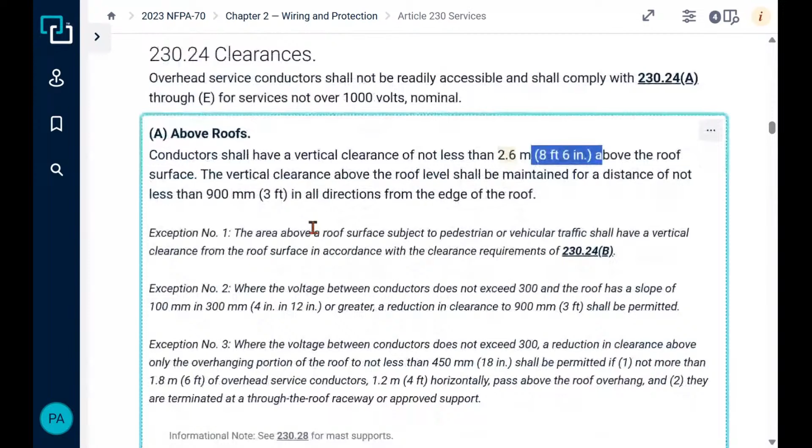Let me get rid of this. Okay, let's look right here. So here's our general clearance requirements. Here's the above the roof. That's our 8 foot 6 inches, 8.5. And here's your maintain it. So here are the exceptions that we're talking about. This is exception number 3.

It says, where the voltage between conductors does not exceed 300, a typical 120/240 volt service, a reduced clearance above only the overhang portion of the roof not less than 18 inches shall be permitted if (1) not more than 6 feet of overhead service conductors, not more than 4 feet horizontally, pass above the roof overhang, and (2) they are terminated at a through-the-roof raceway or approved support.

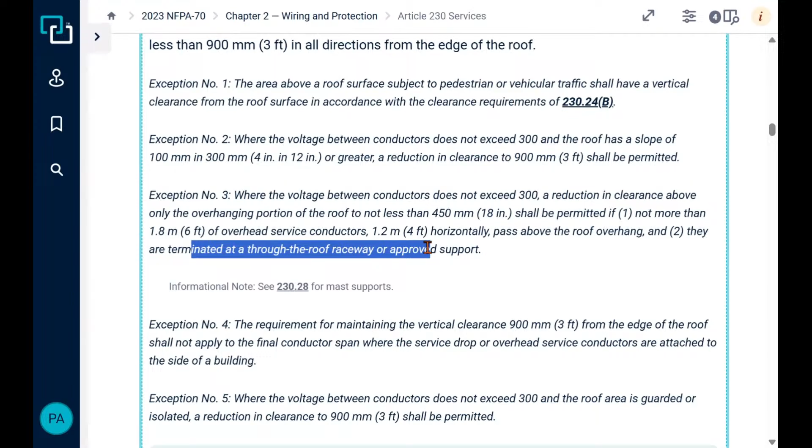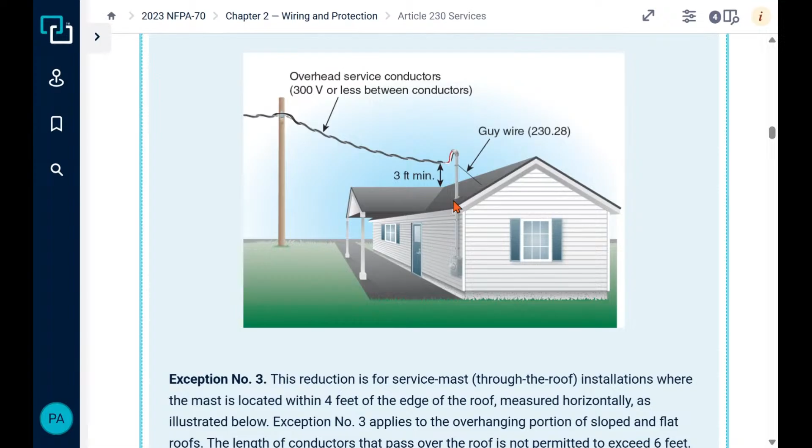This is an example of an overhang right here. Assume this is outside. I can't see. It looks like it is. Yes. So this is through the overhang portion. This portion that goes over the roof can go up to 4 feet. This conductor can span 4 feet, and it can have a reduced clearance at that portion where it goes over the overhang, okay?

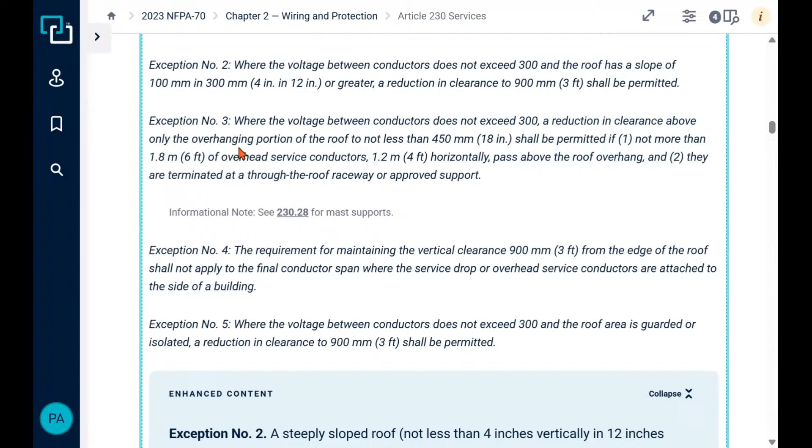So again, horizontally, it doesn't go more than 4 feet. You overall don't have more than 6 feet of overhead service conductor, and over the overhang portion it can be reduced to 18 inches of clearance. So that's this portion right here. I'll zoom in if this helps. That didn't really help. This portion right here.

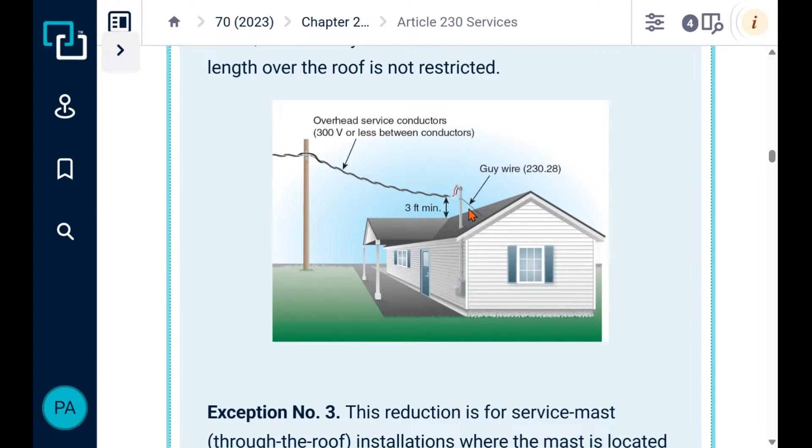Now, in this case, at the point of attachment, I still have the 3 feet, right? This is above the roof right here. But you have some reduced clearance right there where it goes above the roof, okay? Hold on here. All right, let me get back real quick.

And this is their example of this umbrella around it, okay? If you have any questions or that's not clear, please, please, please let me know. And here's a good illustration to show you what it's talking about. So the overhang's not more than 4 feet. The reduction can be up to 18 inches instead of the 3 feet, as long as it's a through-the-roof penetration over the eave.

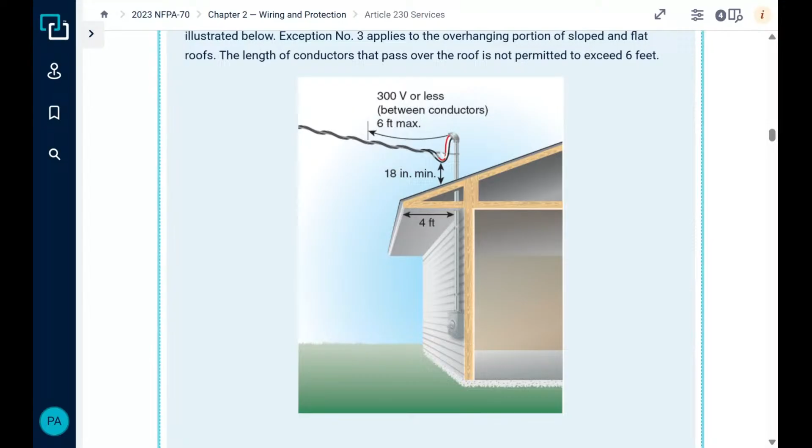And the overall length of conductor is not more than 6 feet. Okay, the overall length, right? Maximum distance. You can have a reduction here where these conductors terminate. Okay, and that is the bottom of the drip loop, 18 inches of clearance. Now, anywhere else over this roof, I could have a 3-foot clearance if I had a slope that was not less than 4/12. Otherwise, I have to stay 8.5 feet above the roof, right?

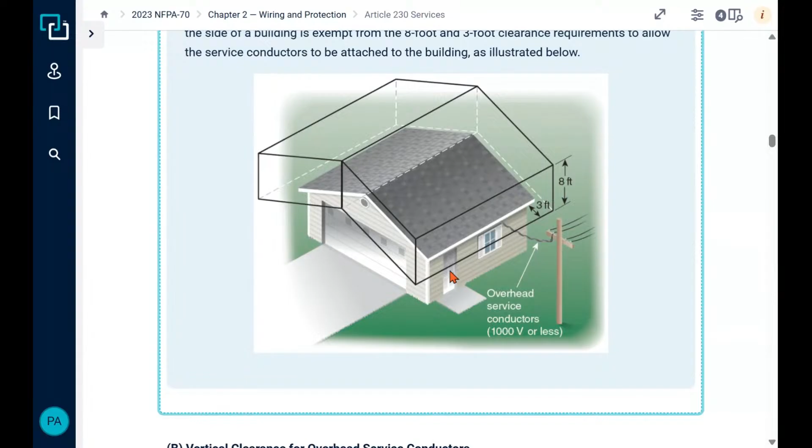And you have to remember that it encompasses this whole roof, okay? 3 feet out, 8.5 feet up, okay? Oops, let me go back here. Right there, okay? Encompasses it, all the way around, okay? All right, let's get back to the lesson.

All right, so, you know what? I probably should have looked at this one here. So here's your 4/12. Let's assume this says 4/12. So for every 12 inches, it drops 4 inches. And here is the service drop coming down. So here is your 3-foot clearance. Got that. All right.

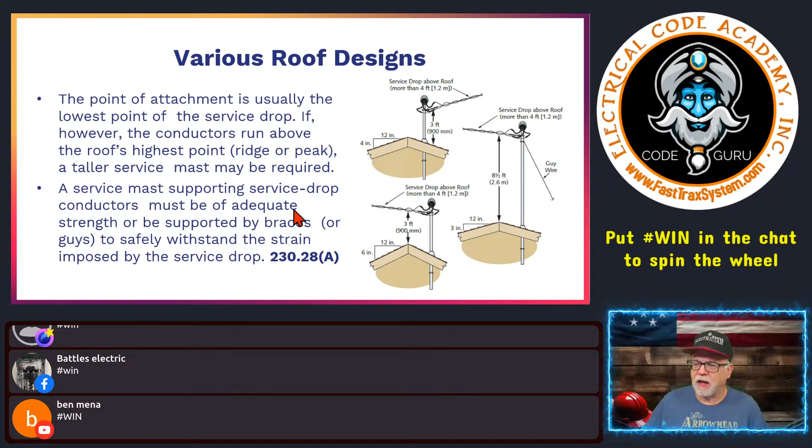Now, this was that reduced clearance we're talking about. So if it's not more than 6 feet linear of overhead service conductor, so the overall service conductor is not passing over the roof more than 6 feet, it's near the edge. The voltage between the conductors does not exceed 300 volts, check, 120/240 volt. The horizontal overhead service conductors measured does not exceed 4 feet. So the path of service drop conductors above the roof is not more than 4 feet.

So the overall conductors, including the loop, is not more than 6 linear feet of conductor, and the horizontal overhead service conductors do not go over more than 4 feet of roof material. Got it. Conductors terminate in a through-the-roof raceway. Obviously these conductors aren't going down in the building, because that would be service conductors entering a building unprotected, so that's not going to work. We saw the allowance where it's considered outside if it goes through the eave. So that's still considered outside of the building here.

The conductor's minimum vertical clearance is 18 inches where all 230.24(A) Exception No. 3 requirements are met. Again, that was the 6 feet, 4 feet of overhang. The conductors can be dropped down to at least an 18-inch clearance as long as you meet all of those, and that's for termination at the weatherhead. And the reduction in clearance to 18 inches applies to sloped roofs as well as flat roofs where the service drop passes above the overhang portion of the roof only. Again, only the overhang portion. Okay.